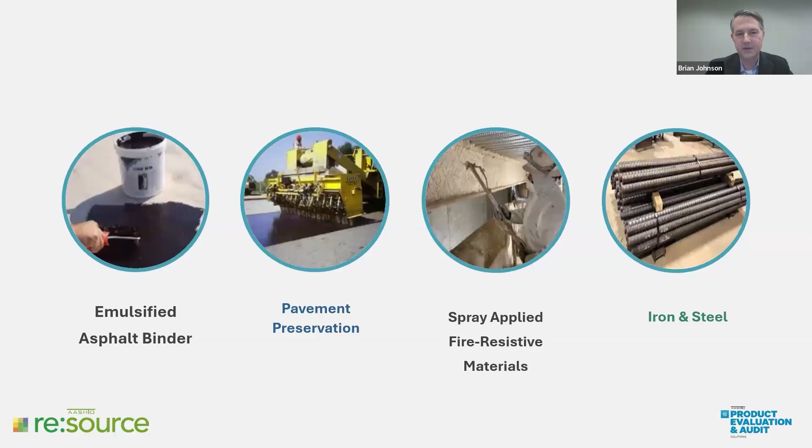I already touched on that briefly, but as you can see, we've got soil, aggregate, rock, asphalt mixtures, binders, emulsified asphalts, pavement preservations, chip seals and slurry seals, spray-applied fire-resistive materials (SFRM)—you can see that being applied right there—and iron and steel.

The assessment process is pretty simple. A laboratory that's interested in getting accredited will submit an application. We review the application and make sure we can fulfill the requirements of the laboratory. We will then assign assessors and get them scheduled. We usually give laboratories about 4 weeks' notice, so we don't perform a lot of surprise assessments. Then the assessors go on site and carry out the assessment.

The assessors will, when they're done conducting the assessment, have a closeout meeting with the laboratory where they review the contents of the report. Then they will finalize the report. It goes through editing and gets emailed to the laboratory contacts and uploaded onto the laboratory's page on AASHTO re:source website.

Now, what goes on during the assessment? There are a couple of different factors that play into it. The big one that differentiates us from other accreditation programs around the world is that we actually watch a demonstration of the testing for all of the tests included in the on-site assessment. So we will actually watch them perform the tests on materials.

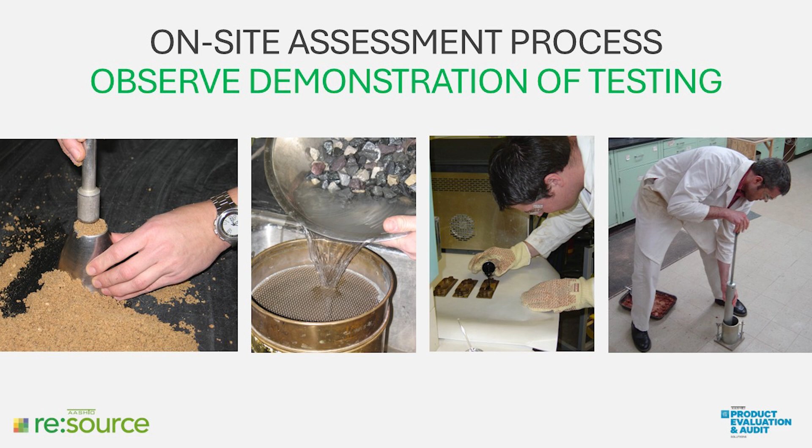Here's an example of photos - kind of old photos - but they show people running tests like what we would see during an assessment.

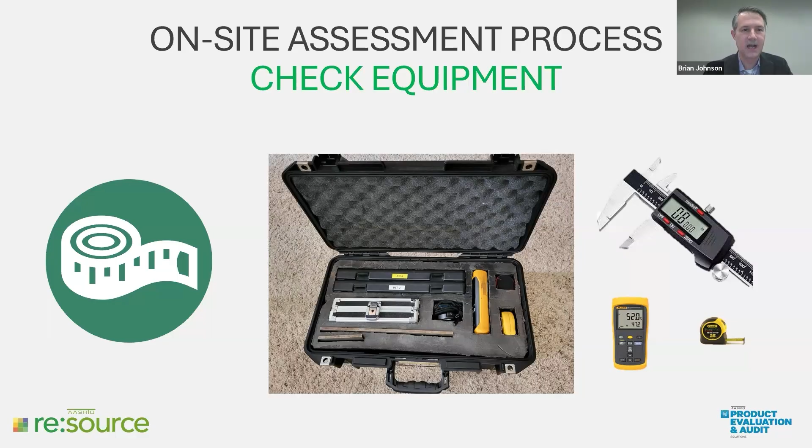We also check equipment. We don't check every piece of equipment; we check a sampling of equipment at the laboratory. Laboratories are generally doing their own checks or having calibrations performed on the testing equipment they use, so our checks are more confirming that those have been done correctly. Not just that, but we'll make sure that if somebody uses a process that isn't quite right, we may uncover that during the assessment when we're checking it with our equipment.

The third part is evaluation of the quality management system. We use AASHTO R18 as the basis for the AASHTO accreditation program. In addition, we include different standards that laboratories would like in their scope of accreditation. This is most commonly ASTM standards similar to R18 but not exactly the same, like C1077, D3666, D3740, and E329. There are a few others that could be included, but those are the main ones.

These assessments include an evaluation of the policies and procedures used by the laboratory, and then we'll also look at the records that result from implementation of that quality management system, to make sure the laboratory is doing things properly, in accordance with the standard requirements and in accordance with their own requirements defined in their quality management system.

And we'll look for anything that might indicate problems they might not be aware of - maybe some of the readings are not the right measurements that were recorded. That happens sometimes. Or maybe there were some improvements that could be made to the training program for the laboratory. Those kinds of things can get uncovered during assessment by looking at their policies and procedures, then comparing them to their resulting records.

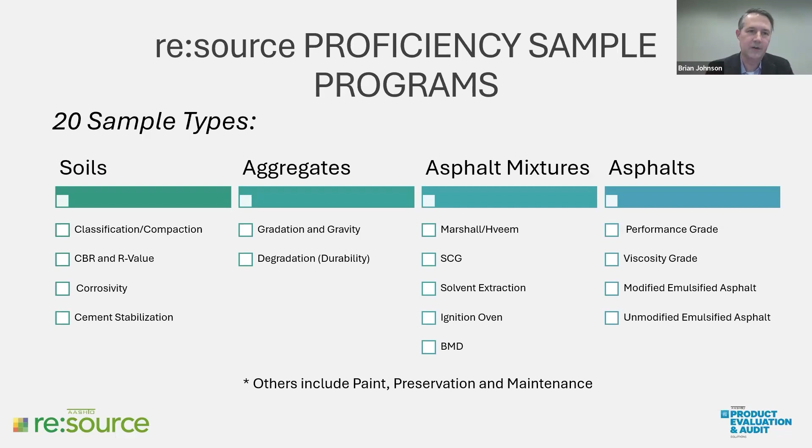And like I mentioned earlier, CCRL would cover the cement, concrete, pozzolan, and masonry products that we wouldn't include, but they would all factor into the accreditation process. For the proficiency sample program, this is a pretty painstaking process that our program director John goes through with his team, where they design these samples that are going to go out to the laboratories each year.

In our office, we have a packaging area, a preparation and packaging area, kind of a warehouse area where these samples are prepared. They get shipped from here in Frederick, Maryland, sent out to all the laboratories. Then the laboratories have a certain amount of time to test those samples.

Once they're done testing them, they enter them into our system. Once the closing date occurs, all of the results are averaged and standard deviations are determined, ratings are issued, and laboratories get the reports on how they did.

So for every line item in a proficiency sample report, you can see the spread of data. Those points on the left represent the spread of all the participating laboratory data on that round for the two samples. They're all shipped out in pairs.

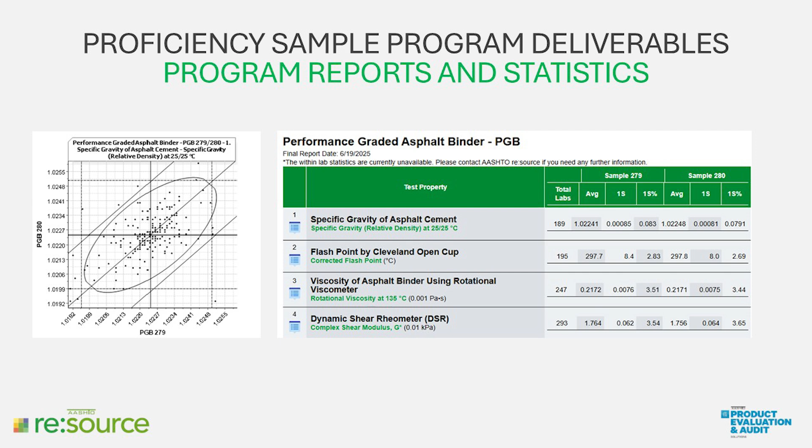As you can see on the right side of the screen, we list the total labs that participated in the round, the average, what one standard deviation would be, and then the percent of their standard deviation that they had, which is what factors into the ratings that they ultimately get.

We use the ratings for each sample to determine their accreditation status, so that if you get repeat consecutive low ratings or non-participation, that can result in a suspension.

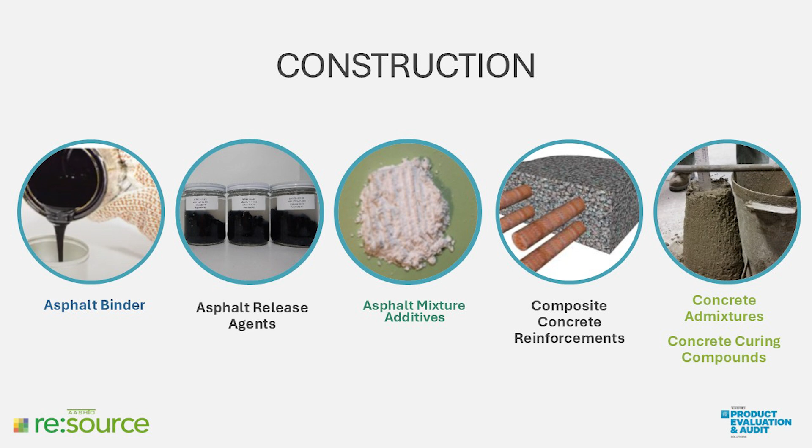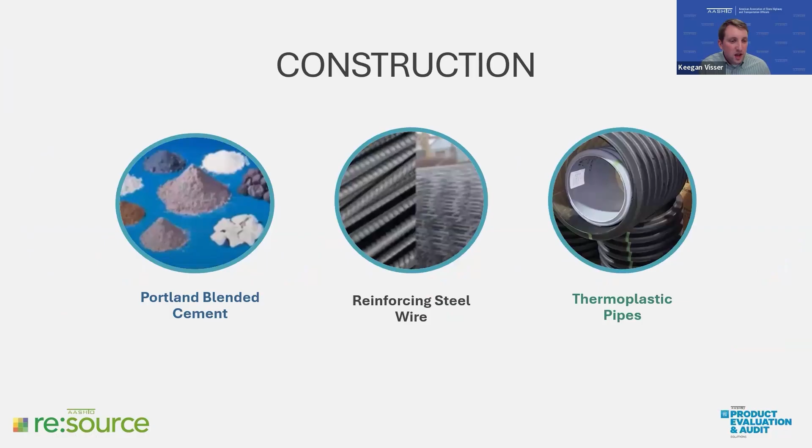So now that we've focused on what the program is, I'll talk a little bit more about the product categories that we handle. They mainly fall into three different buckets. Construction includes our asphalt binder, asphalt release agents, asphalt mixture additives, composite concrete reinforcements, concrete admixtures and concrete curing compounds, corrugated metal pipe, bridge bearing pads, epoxy resin binder, geotextiles, guardrail, guide rail, Portland blended cement, reinforcing steel and wire, and thermoplastic pipes.

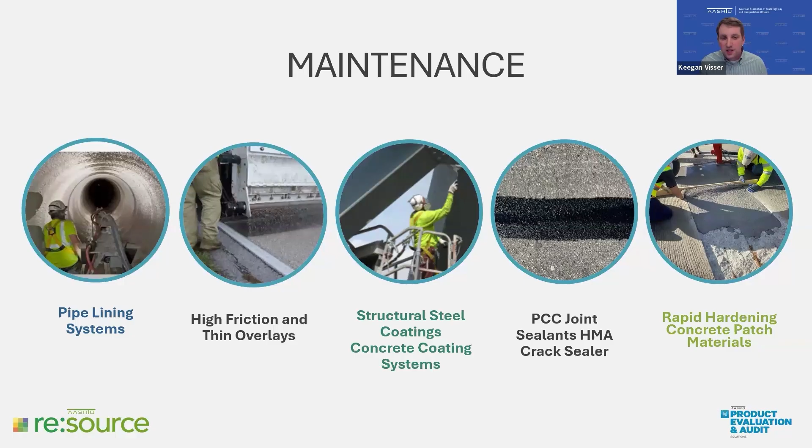We also have a bucket for maintenance type products, with programs for pipe lining systems, high friction and thin overlays, structural steel coatings, joint sealants and crack sealants, and rapid hardening concrete patch materials.

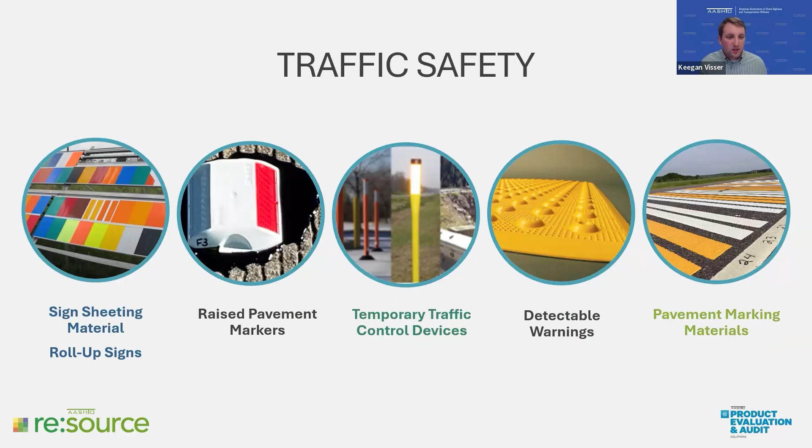And then finally, our traffic safety categories, which have our original programs of sign sheeting materials and pavement marking materials, along with raised pavement markers, temporary traffic control devices, and detectable warning systems.

For the product evaluation side of things, the process is that manufacturers will submit an application for their product to the program through our DataMine website. The applications are reviewed by an AASHTO staff member who makes sure that what the manufacturer submitted meets the work plan requirements for types of paperwork submitted and information submitted.

If that's all acceptable, we send it on to be assigned to our testing facility, which is either a private lab or a state DOT lab, since we contract with both. The testing is performed in accordance with our work plans, and the data is uploaded to DataMine.

It's provided for review to the manufacturers, who can choose whether they want to release it or withdraw it from the program. If they choose to release it, the data is made available to all our DataMine subscribers on the DataMine website. The deliverables for the evaluation programs include testing such as compositional analysis, accelerated performance testing, and things like that.

So the data coming out of that is either output through numerical data directly available in Datamine on the tables on each of the product pages, which are then searchable through the Datamine program. They can also be PDF reports, which also contain the evaluation data, or visual inspection and images for things like field testing or wear, stuff like that.

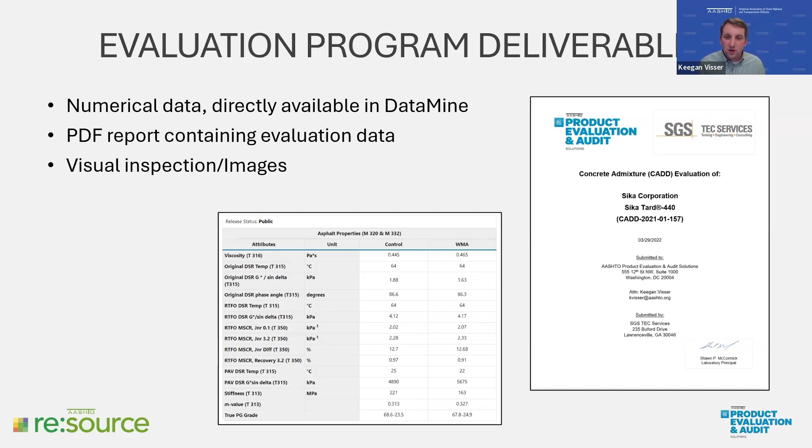And then to talk about the other side of the program, the audit side, I'm going to pass it back over to Vince. Thank you, Keegan. So now we'll cover the audit program process under AASHTO Product Evaluation and Audit Solutions.

First, the manufacturer will submit an application. Then the applications are reviewed and approved by a liaison. The liaison then has those audits assigned to an auditor. The audit is then conducted. Afterwards, the testing lab submits results to the auditor, and an audit report is then finalized and uploaded into Datamine. Data is made available to all applicable subscribers because we have varying subscriber levels.

All right, but now let's review some of the components of the audit. QMS review. This consists of verifying the QMS against the current SP01 and work plan requirements and ensure they include the corresponding documents and address all the required aspects.

The facility audit itself is a review of the manufacturing process. It confirms the process is performed according to the QMS and relevant procedures, verifies the testing is performed according to applicable procedures, and takes samples for testing as needed.

Next, there's the document review. This verifies that the manufacturer has the corresponding methods and specifications, verifies a completion of equipment verification, calibration, or standardization against SP01 and QMS, and verifies training and competency records, reviewing the traceability records.

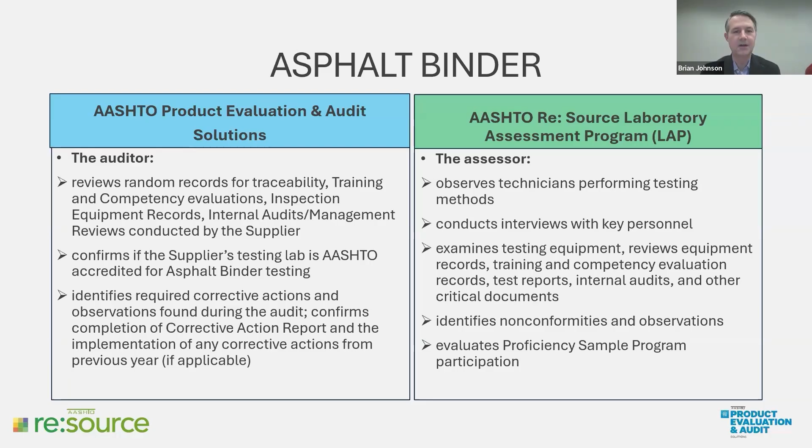There are some similarities to note there because R18 includes quite a few of those same bullet points. But the assessor is also going to be watching testing, talking to key personnel involved in the implementation of the quality management system, reviewing records, policies, procedures, equipment. They identify nonconformities and observations in the reports, like we showed earlier, and they're looking at proficiency sample participation.

Under AASHTO Product Evaluation Audit Solutions, the frequency of the audit includes an initial audit to begin with, and then an annual audit thereafter. Every 5 years, including the initial audit, there's a desktop review and quality system manual review. The deliverables available to AASHTO members and the audit supplier through the DataMine interface include the audit report, the compliance authentication, and the corrective action reports, and any other reports that may be specific to that technical committee program—in this case, asphalt binder.

There will be monthly summary reports, and those would also be available to the AASHTO members as well as the audit supplier.

Now, our assessment staff targets a 27-month interval between assessments, so it's not every year. Right now I can't remember exactly where we're at, but we're a bit over 27 months as we've been recovering from the time we were dealing with COVID. But we're honing in on that 27-month interval.

Like we talked about earlier, the deliverable for the assessment team is the assessment report. One note: participation in the PGB proficiency sample program is required for AASHTO R18 accreditation—that's for asphalt binder.

Now we'll cover the differences when it comes to Portland and blended cement. Under the AASHTO Product Evaluation Audit Solution program, audits for Portland blended cement suppliers cover mills and terminals, including ports of entry specifically. More of a definition, if you're interested, can be found in the work plan regarding the definition of a port of entry.

The determination of compliance with standard practice of qualification of highway product manufacturers through the use of AASHTO audits, SP01, and the PBC work plan.

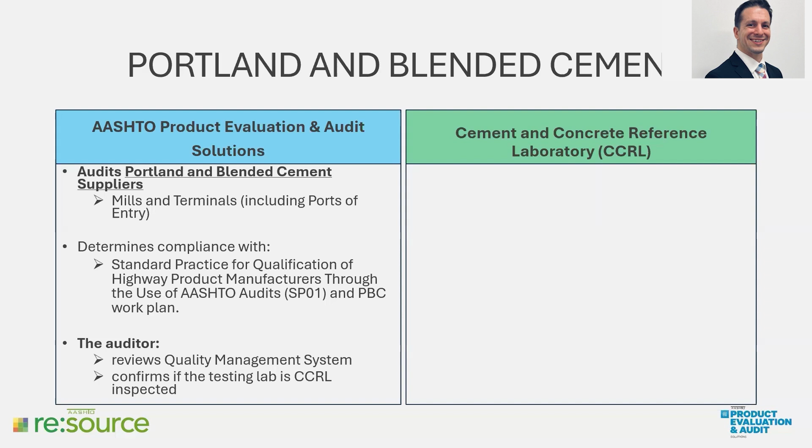The auditor reviews the quality management system and confirms if the testing lab is CCRL inspected. So like I said earlier, CCRL would cover this. AASHTO Resource does not cover these assessments, but CCRL does. They call them inspections, but it's the same thing as an assessment, just different terminology. CCRL is part of ASTM.

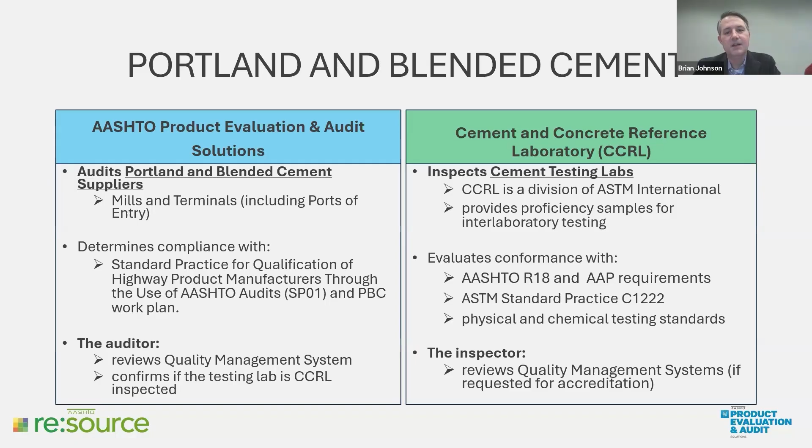They provide proficiency samples just like we do, and they'll be evaluating conformance using ASTM C1077, and for cement C1222, as the basis of their program. If the laboratory is going for accreditation, they'll also look at AASHTO R18 and the AASHTO accreditation program requirements. They look at physical and chemical testing results if somebody's interested in getting accredited for chemical testing. The assessor will evaluate the quality management system for R18 if they're getting accredited. If they only need to be inspected, though, they're just going to look at C1222.

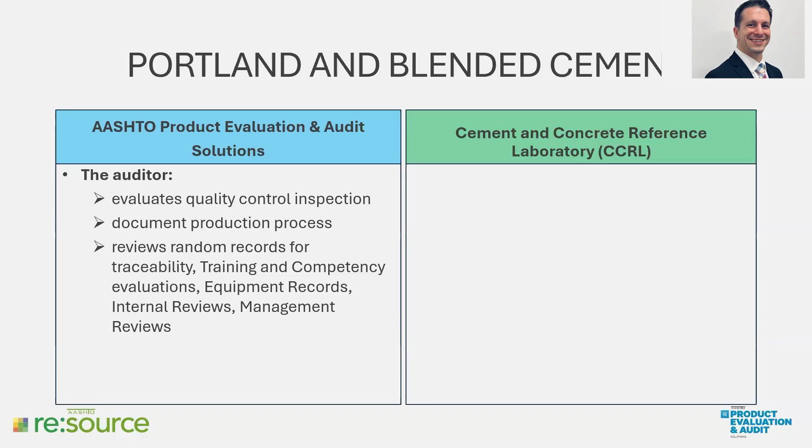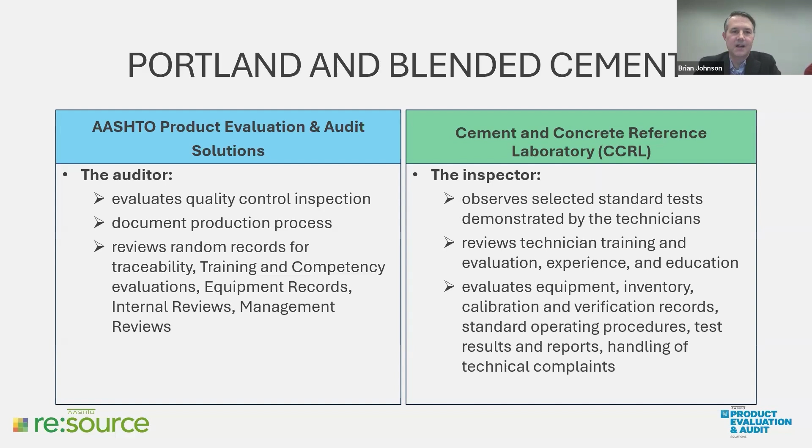Under AASHTO Product Evaluation Audit Solutions, the auditor evaluates quality control inspection, documents the production process, and reviews random records for traceability, training and competency evaluations, equipment records, internal reviews, and management reviews. The CCRL inspection should be pretty much like the AASHTO resource assessment, where they're looking at the test the laboratory requested, watching them run the test, checking the quality management system, policies, procedures, records, and everything defined in R18 and C1222.

Furthermore, under AASHTO Product Evaluation Audit Solutions, the auditor collects test comparison samples from mills. They collect physical and chemical properties, terminals, physical properties, and ports of entry, physical plus chemical properties if requested.

The auditor identifies required corrective actions and documents observations found during the audit and confirms completion of the corrective action and implementation of any corrective actions from the previous year.

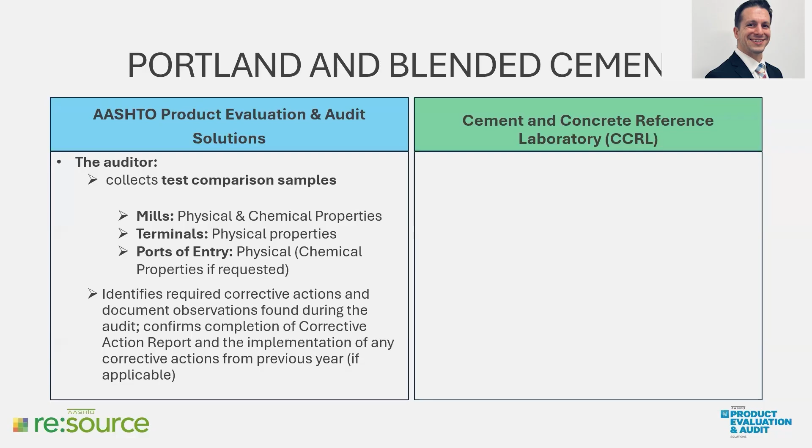CCRL will not be taking any samples away from the laboratory, but they will be looking to see what the qualification testing was at the laboratory if they're getting accredited for chemical testing. They're also going to make sure the laboratory has been successfully participating in the CCRL proficiency sample programs. Since they offer Portland blended limestone cement samples, we just say whatever that laboratory is normally testing, that's what they should get enrolled in. That's what we would evaluate when looking at the accreditation requirements.

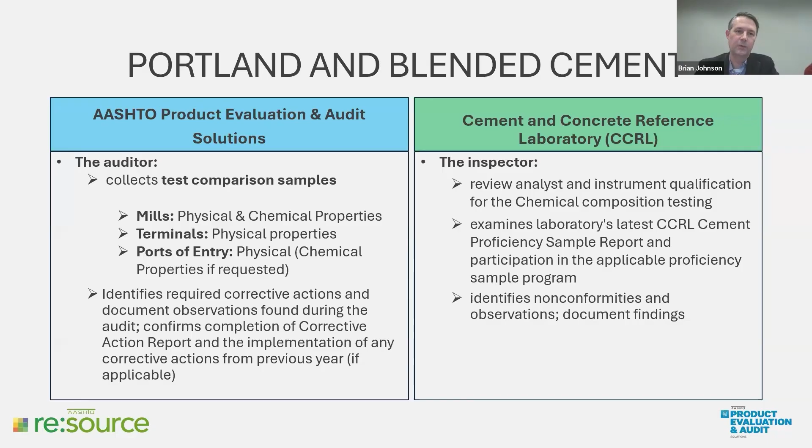Regarding the AASHTO Product Evaluation Audit Solutions frequency of audits, just like ABS, we have the same with initial and annually thereafter. The desktop reviews are done every 5 years, including the initial, and this includes the quality system manual. The deliverables are available to AASHTO members and the audited supplier, including audit report, compliance authentication, corrective actions, along with summary reports, all available in the industry document repository as well as in the module.

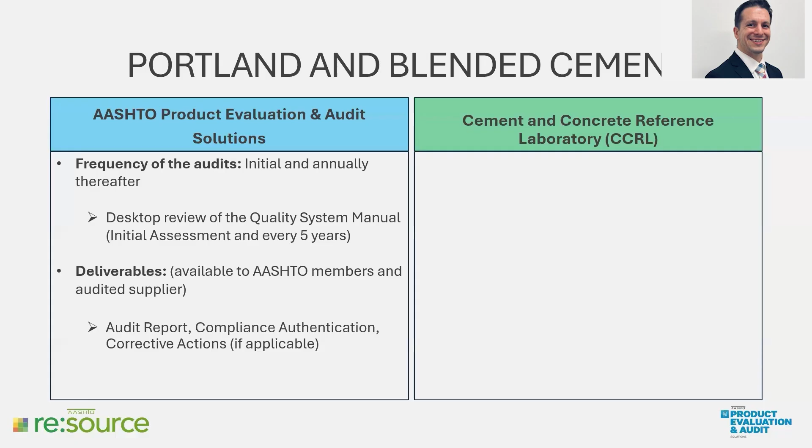For CCRL, they're targeting that 24 to 30 month interval. For the DOTs, it's going to be the exact same as the AASHTO resource interval now because we're doing combined assessments. But for the private laboratories, it may vary depending on where they are on the tour. The deliverable is going to be that inspection report, which is again, inspection and assessment are the same thing.

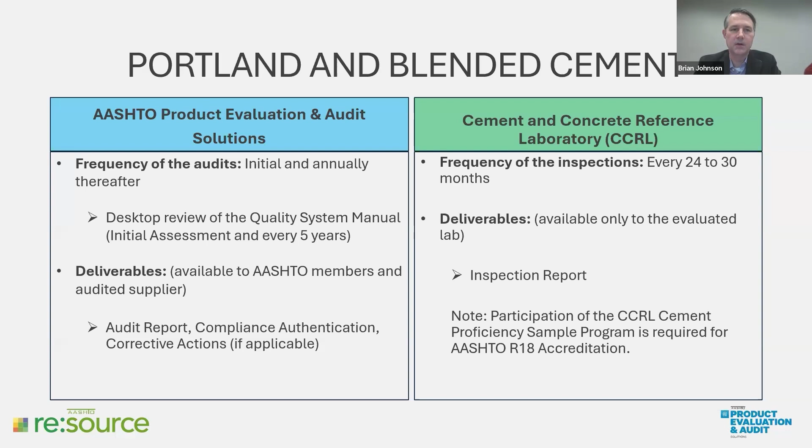And proficiency sample program requirements do fall into play with AASHTO R18 requirements and AASHTO accreditation policy requirements.

So there you have it, 2 AASHTO programs, 1 shared goal. Both AASHTO programs ensure consistency, integrity, and cost effectiveness through unbiased procedures while setting high standards to assess products, facilities, and laboratories across the transportation industry in support of a safe, reliable, and efficient system.